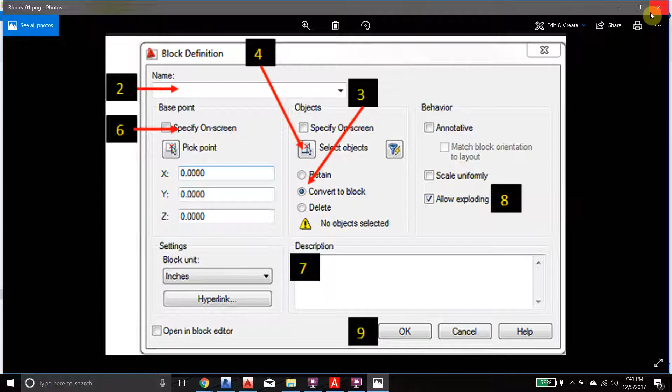If you cannot explode the block, then you have to go inside the block and then change it or rename the block. This is another story. Okay, so it's always better to keep the allow exploding on for the people to use.

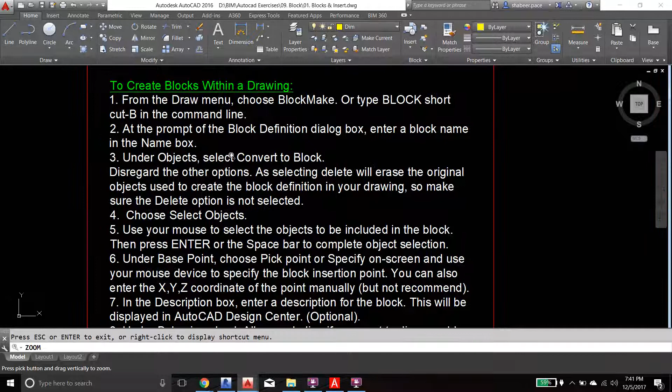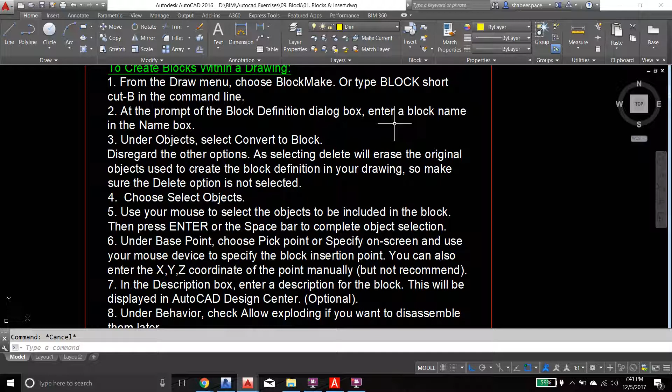And if I'm going to the block drawing, let us try to go a little bit in detail from the block. Like from the draw menu, choose block make or type block shortcut B in the command line. At the prompt of the block definition dialog box, enter a block name. This is all the steps which we were discussing there, like in the image, if you can see the image again. Yeah.

Okay. And 3, under objects, select convert to block. Disregard the other options, as selecting delete will erase the original objects used to create the block definition in drawing. So make sure the delete option is not selected.

Okay. The fourth one is choose select objects. Here you have to select the objects which you want to convert to the block. 5 is not here because it is here. Use your mouse to select the objects to be included in the block, then press enter. This is a common thing which you're doing in AutoCAD. Whenever you select all the objects, you will just right click to confirm that the object is selected. Okay, or the space bar.

The 6 is, under base point, choose pick point, that is here, or specify on screen, and use your mouse device to specify the block insertion point. That we can do now when we do a sample of the block. And in the description box, enter description. If you want to enter any kind of description for the manufacturer, for the site, then you can enter such a description for the block here.

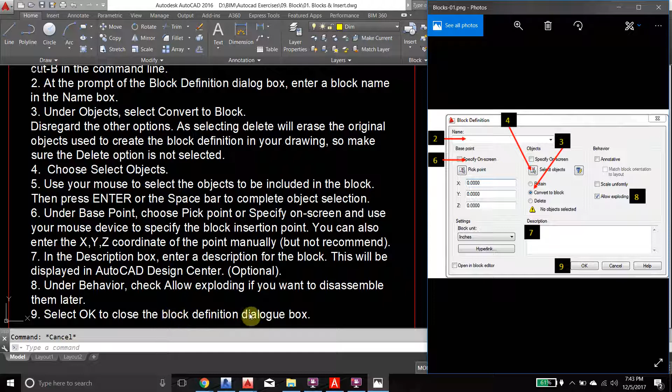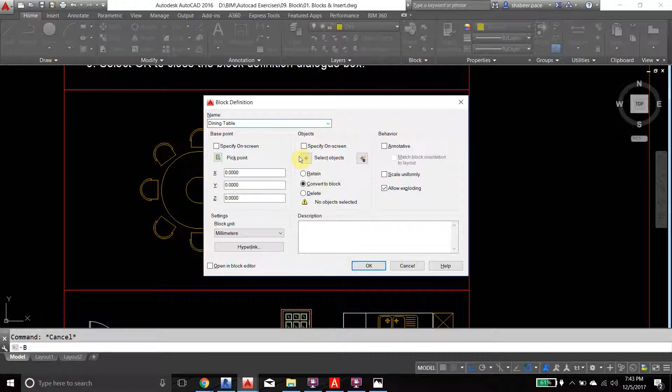Okay, fine. So I come back to the CAD, and these are all random objects which are single entities. So what I can do is I can type B enter. Let's say I gave a proper naming, dining table. I'm going to follow the steps. Select object. Okay, pick point. I need to pick a point. The pick point is important because later on this pick point will help you to locate the block.

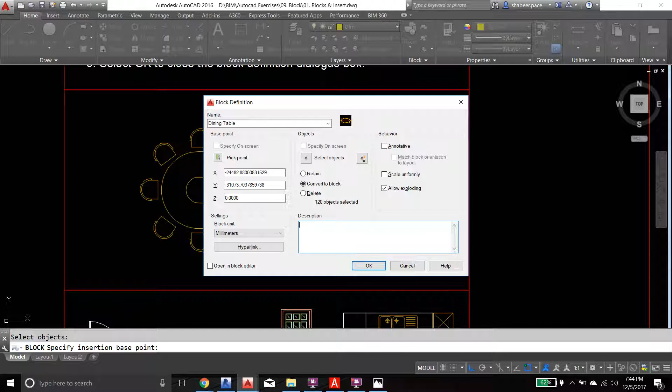So let's say I'm going to pick the point here. Remember this point, and allow exploding is done. So 1, 2, 3 and 4. That's fine. Let's say here, if you want to write something, we can say 12 seater dining table, something like this if you want it. But anyway, I'm going to remove it and then just say okay. Okay, so now it's a block.

I selected it and I went to the properties. I can see here what is the name of the block. Dining table, rotation is 0, annotative none. Block units, what are the units for the block? Millimeters. Now can you tell me what is the insert point for this block?

Insert point, this blue tag. But why are we getting this one here only? Yeah, because when you're making a block, we set pick point. We set it here. That's why the block is coming here.

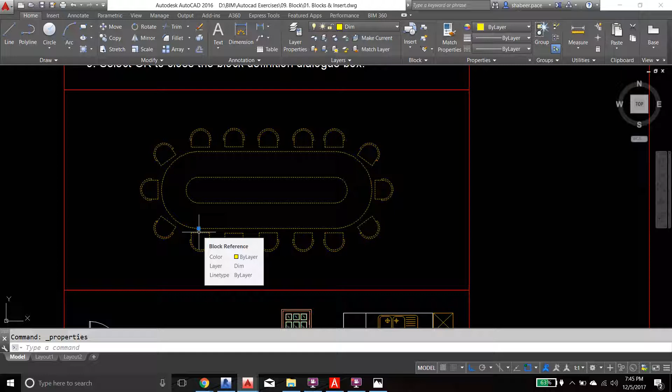Now when I type I, enter, insert. That is another one. I, enter. I can get this block back, but you have to click to paste this block. But until you click, the cursor will be holding this block at the point where you set pick point. Okay, that's the importance of the pick point.

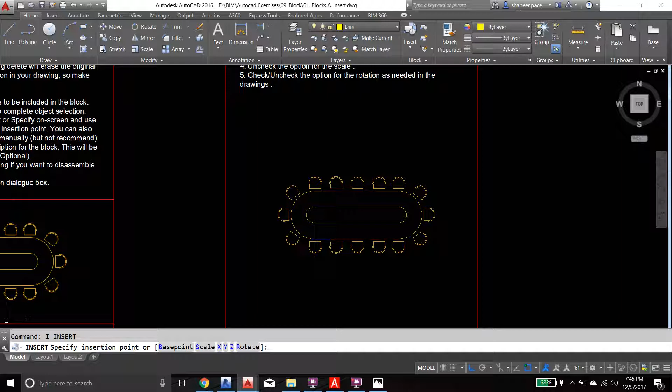Sometimes it is very important actually when you're trying to look at the doors and the windows. It can be very crucial. Okay, so there is a block. But she asked me one question. I'm going to the properties. What's the name of this block? Let's say it's a very big one, Herman Miller work chair and all these things.

Okay, first of all, let us try to simplify the name of this block. What is the command to change the name of the block? No, Text edit. No, Name edit. No. Rename. Okay, so I went to the block and I'm going down, down, down. This is because it's from Revit.

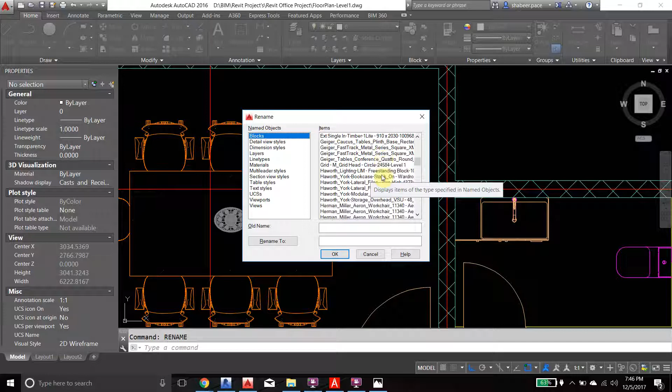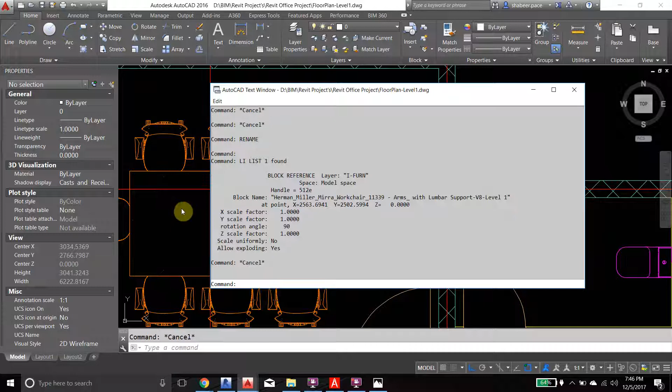Yeah, I think in that case we need to know the exact name of this one. So I will go to the list. So it is 11339 arms with lumbar support V8 level 1. Let us see if we remember this one. 11339 here. Okay, so this is the original name and I want to change it.

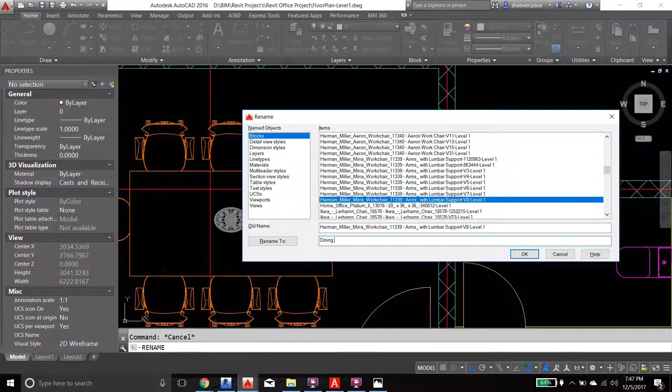So let's say I will make it very simple. Dining chair. Okay, now the question is these two, why it's changed. Dining chair. Okay, all these are by the different names. Okay, anyway, I don't want this one. I will just copy this here. Okay, I said this one, I said this one. Now these two are having the same name of the block.

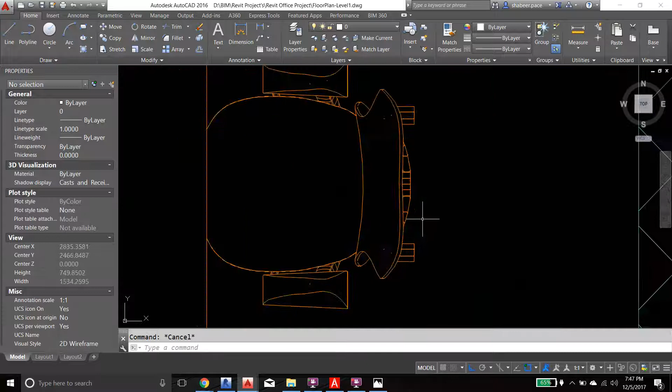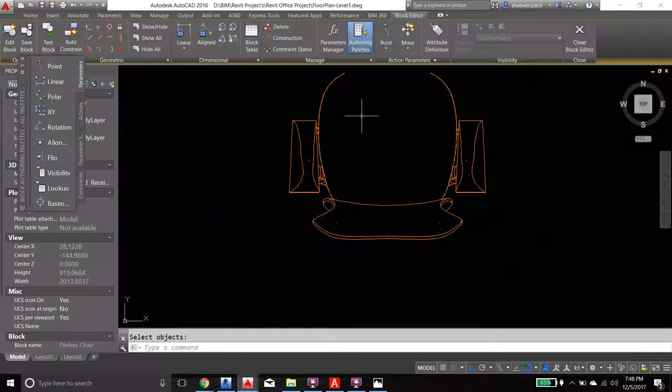Okay, now what I'm going to do is I will just go here. Let's say I don't need these edges, something for the material, so I will just go inside the block and I'm trying to do some modification. Let's say I deleted this one, I deleted this, I deleted this, and I deleted this one. Okay, then I do right click, close block editor, save the changes. The changes are edited here, right?

The changes are done here also, but her question is she wants to do the change in only one place, not the other place. Then how can we do this? Okay, to do this one, first of all we have to understand that if the block name is same, then there is no chance to do this one. If you have the same block name, then it will be applied in all the places automatically. The first thing is we have to change the block name for both of this.

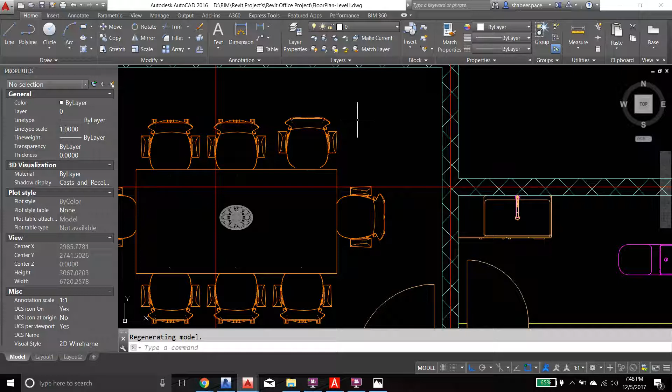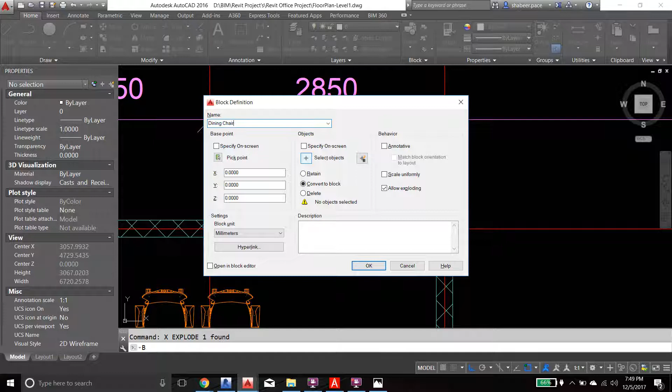So what we will do is we will just try to keep it here or move anywhere. Let's say we move here. The first thing is that I will select it and I will explode it. I will come out of the block, the first step, and then I will make the block again. Let's say dining chair 01, select objects, pick point, let's say here. Okay, now you see it's a block. I'll just move back.

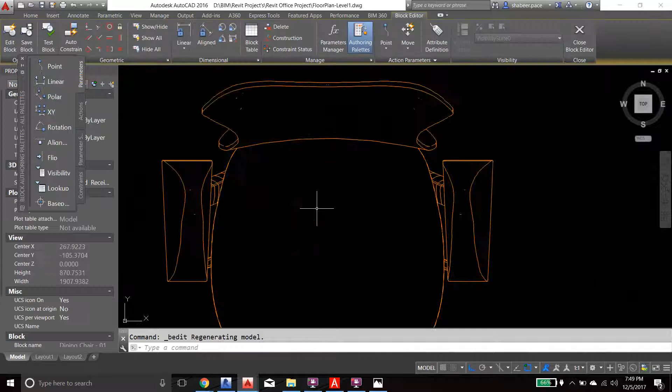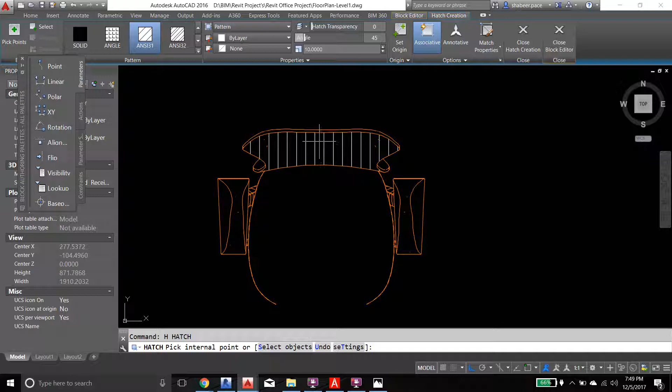Okay, now I'm going to go inside the block, and let's say I put some hatch here, pick point. Yeah, unfortunately there is some problem with the hatch. Let's say I'm trying to choose some different hatch and change the angle 45. Okay, I don't worry if it's right or wrong, but just to show you, right click, close block editor and save the changes. So the changes are done here. Are the same changes applied down also? No. Why? Because both are different blocks.

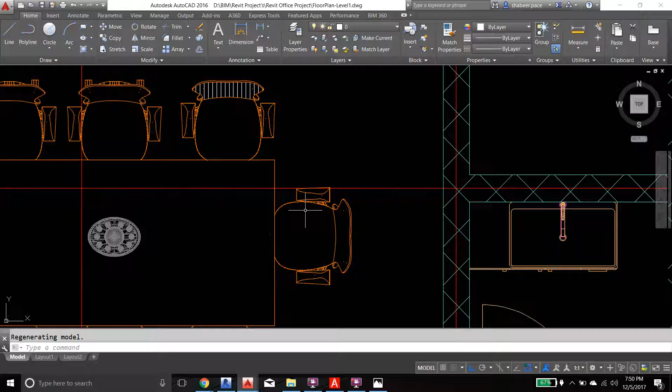So sometimes what happens is, as in the case what you're doing, you will get a block from somebody, you want to use it at one place, but the other place you want to use the same block but with minor changes. So what you will do is, you will not disturb the original block. First of all, take this block and keep it in open area, like a blank space somewhere, explode it. But you should be very careful when you're exploding.

Sometimes when you explode, the inside objects like annotation, text and all this will get disturbed. So you have to be careful when you explode to see that it's looking the same, visibility, everything is same. Then make your changes and make the block again, and then you can apply it in the places. And now I go back to the layers.

Okay, here, this is to make a new layer, this is to delete the layer. What does freezing a layer mean? Yeah, I will come to this one. And this is to make the layer current selected.

Okay, what is the meaning of current layer? Whatever you draw will be drawn in that layer. Yes, so whatever we are drawing now, we have to say that this is current. Let's say we are doing the furniture, so we'll set furniture as current. We are doing electrical, we'll set electrical as the current layer. We are doing the architecture, we'll set architecture as the current layer. And whatever is the current layer will be shown by a green tick.

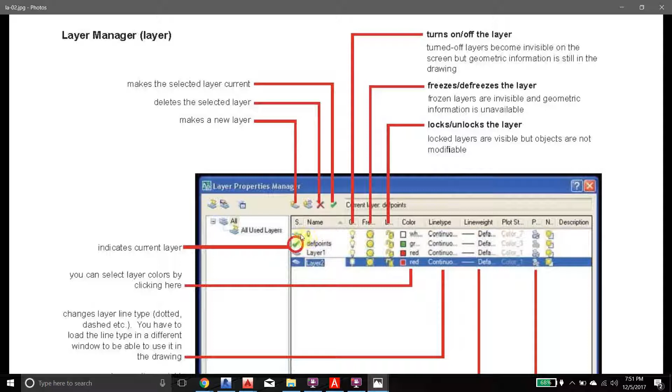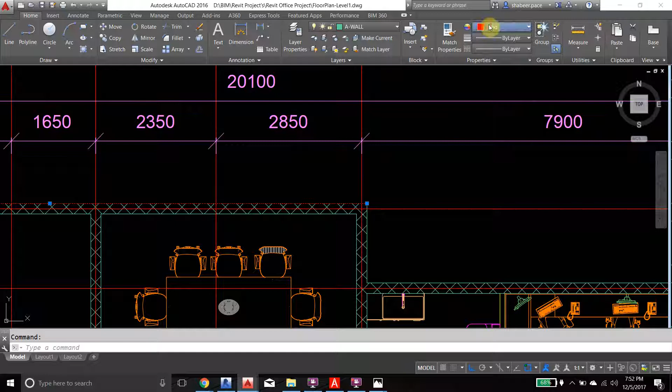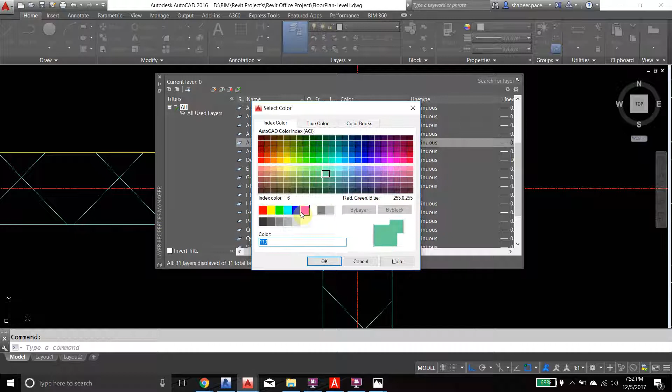Let's come to the easy terms first. We can change the layer color anytime by just coming here and changing the color. It will be applicable in all places in the drawing. I can give you an example of this one. Now what is this layer? Wall, right? What is this layer? Wall. Okay, I'm going to the layers, I go for the A-wall, and I'm going to choose the color. Let's say I'm going to make everything blue. I say okay.

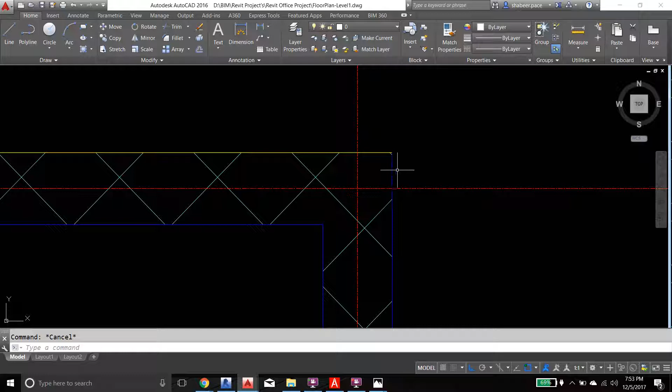What is this layer? Wall. What is this layer? It's a wall, because I select these two, it is showing the wall. If I select this one, it's showing the wall. But what is the problem, that it is not changing to blue? You have to go to the properties. There is, as I was telling you in the beginning, color. What is the color? By layer. What is this color? Yellow. No, that is wrong. I click here and say by layer. So if it is by layer, then it will change automatically. If it is not by layer, then you cannot change it from the layer. You have to do it manually.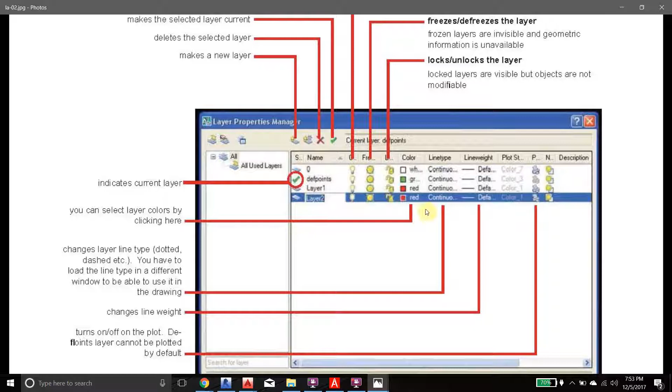And line type is whether you want it continuous or you want a dash line. We can see a simple example of that. We go back to the wall layer again. I click here, you see I can see different kinds of line types. Let's say hidden, and I say okay, close. You can see it's changed.

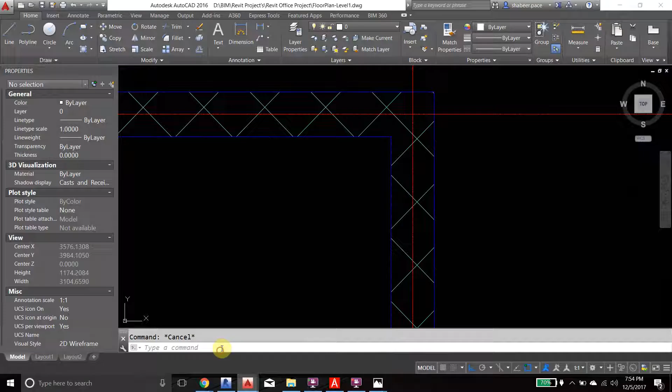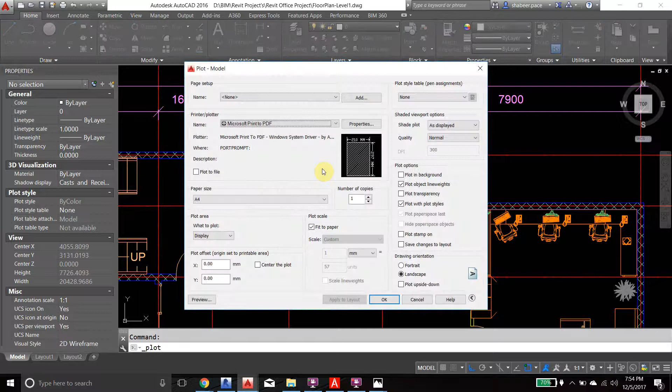And the line weight can be the thickness of the wall. Let's say I go back to the CAD, I'm going to the layer and again the wall here. Let's say 0.4, say OK and close it. Let's go for the printing. I guess it is already selected. I'll just see the preview. Can you see the wall line is thick, right? Because of the factor which we gave there. But if you look in the drawing, it's a simple line.

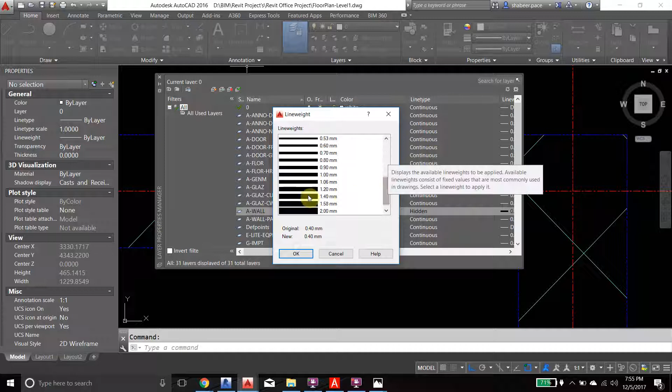Now I'm going to experiment more. I will go here, I will set this one to, let's say, 1.4. Close. I can't see anything here. I'll go for the printing and see the preview. Here it's not applied, but you can see here it's thicker. Because here the line weight is by layer. I guess here the line weight is not by layer.

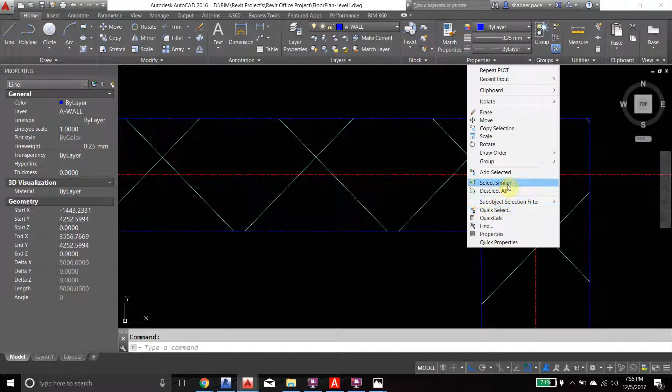Now it is a very tricky question. How can I convert all these lines to by layer directly? Very good. You select one line and say select similar. It's a very important command. Line weight, by layer. So now it's perfect: by layer, by layer, by layer. Now let us see the preview. You see. So sometimes you want to show your line dark in printing, but in the drawing you want to keep it very simple. Then you can play with the settings here.

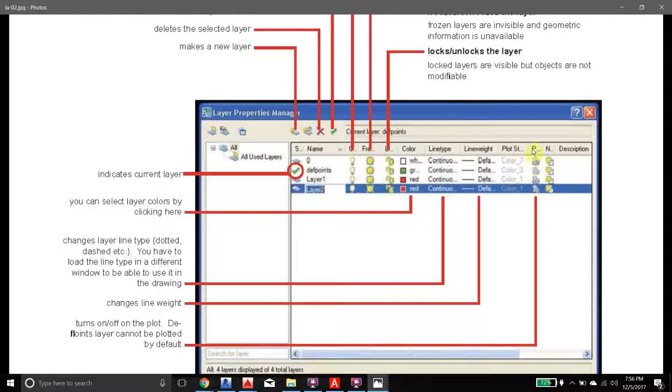There is line weight, and you face this problem before printing. If you come to the drawing, layer, the wall, and you set it non-printable and close it, and you see the preview, can you see the wall? So whenever you mark anything non-printable, it will not show in the printing. Sometimes you want to show objects in the drawing, but you don't want to show them in the printing.

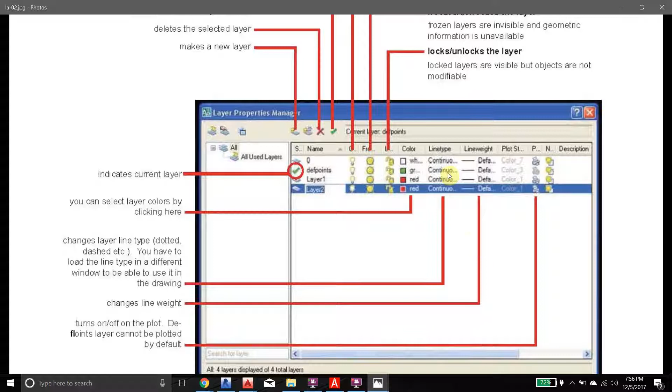Okay, now coming to the questions: turn on or off the layers, freezes or defreezes the layers, locks or unlocks the layers. The first thing is the locks or unlocks. Like if I come to my drawing again, and let's say here there is a lock symbol. I am going to lock the walls. As soon as I lock any object, mainly the objects will be like half visible. Half is going to be very light, and you know, when you select it, you cannot erase them, you cannot move them, you cannot copy them, you cannot duplicate anything. Okay, this is the first thing.

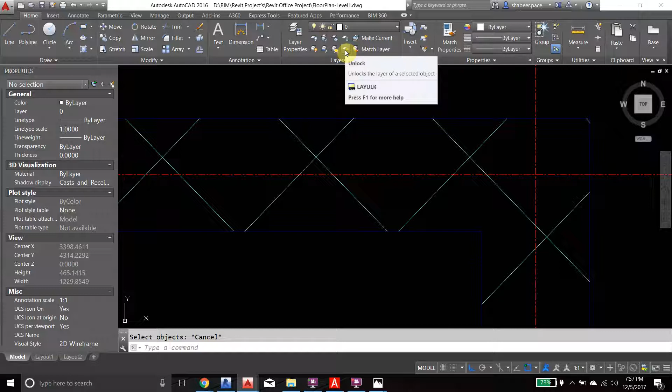And then there is an option here, unlock. So select unlock and then come back. This can be done from here also. Lock, unlock, lock, unlock. Okay, now coming to these options, on, off. Basically when you look at the on and off commands or freeze command, you can find that the application is the same. I mean, you can see that on and off is doing the same thing, freeze defreeze is doing the same thing. Then why do we need the two options for this one? Let's say wall, if I off the wall, in the background you can see the wall is gone, right? If I freeze, the wall is gone. So function is the same.

The function is of course the same, but you know, here what happens, when you're working on complicated objects, you need to off the things sometimes for a longer time. Sometimes you want to keep it off permanently. For example, if an architect is working on an electrical drawing, he doesn't want to see too many electrical objects in his drawing, but he cannot delete it also, because he needs it as a background later on, maybe after some time, or when he gives back the drawing to the electrical people.

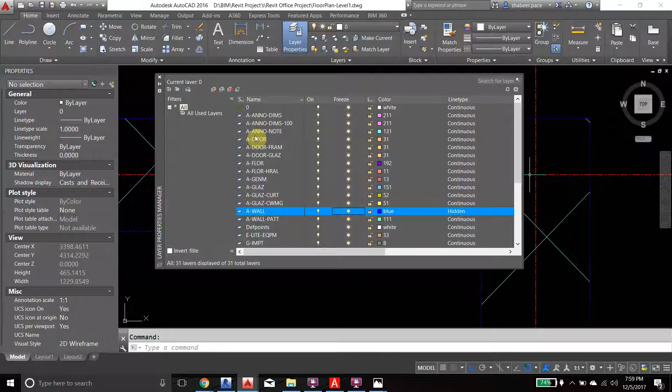So the thing is that if you want to turn off something permanently or for a longer time, then we will be using the freeze. Okay, and then you can use on and off in your daily activities, on off, on off. If you want to keep something off for a longer time, go for the freeze one. Okay, close it. Okay, so that is about the layers. I think it's 95% almost covered.

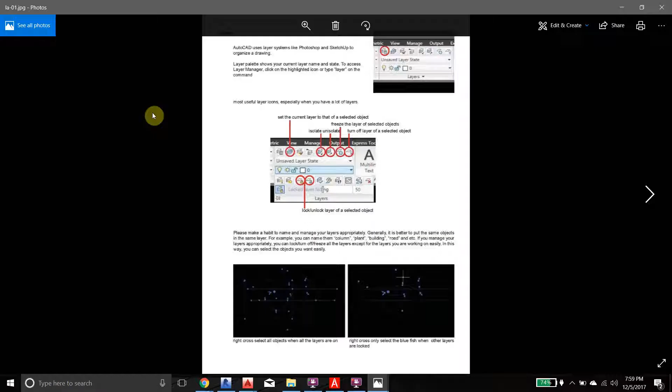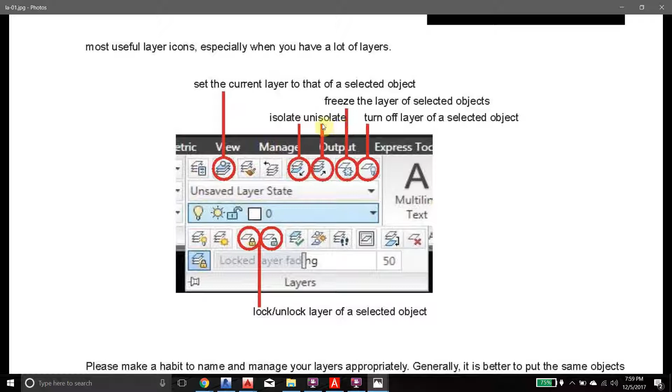I think here some more options. The same thing you can find here also. Set current. Okay. Isolate, freeze, turn on and off is okay. Done. Lock unlock is okay. But something is missing. Isolate and unisolate. Okay. Now when I look at this drawing, I want to see only the walls. I don't want to see anything else. What can I do? Yeah. I want to see only the walls. I don't want to see the remaining things.

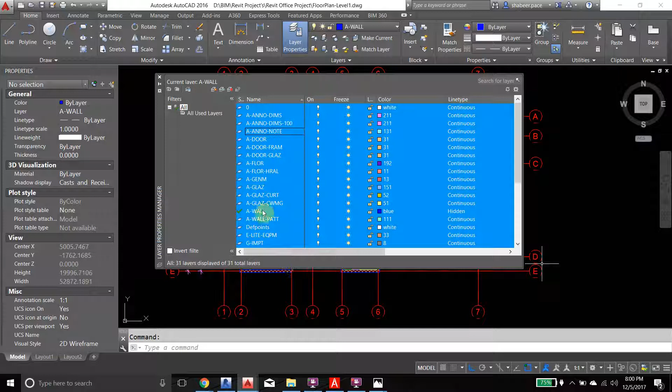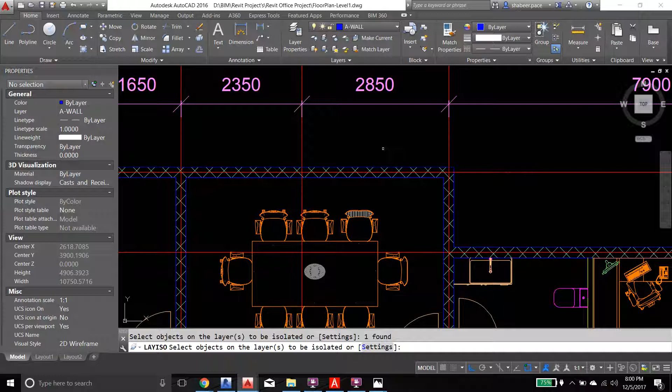So the general thing a beginner can do is you can go to the layer and you can select the wall, make it current, okay, and select everything except the wall and off or freeze it, right? So we can see only the walls, but there is another way for this one. There is something called isolate. So here, click on isolate and select the drawing and right click, enter. So if you go to the layer, you see everything will be off automatically. Isolate command can be actually here. If you go down, there is unisolate. Click this, it will come back to the previous.

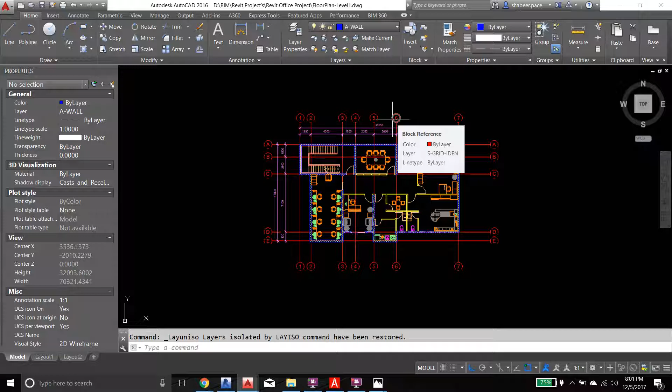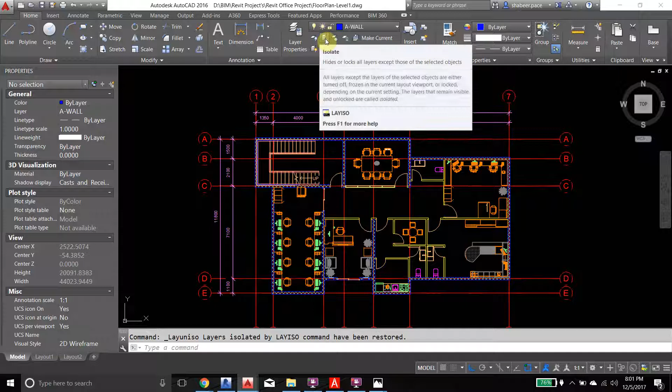Isolate command will be very useful, and you have to actually learn the isolate command because you use it time to time in your daily activities. It is a very useful command actually because you cannot go to the layer every time and select and on and off. You need to be very quick. So just isolate and select the latest one, right click, and that's it. And then after doing everything, unisolate it. Okay, isolate and unisolate. On off, it's easy. You just need to practice a little bit. On off, isolate and unisolate, freeze, defreeze, lock unlock, make current, match layer. Okay.

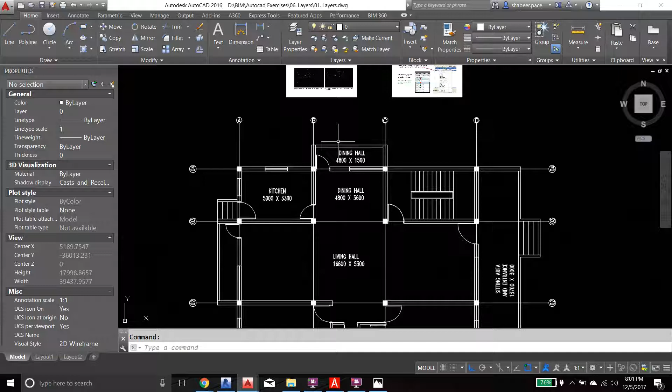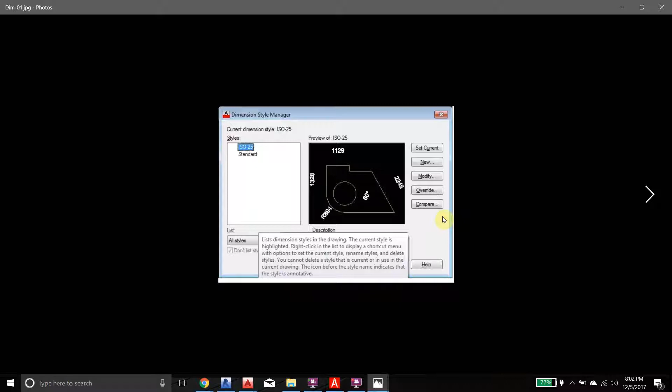And if you open the drawings, we did a big exercise on this one, you remember, like we tried to put all this in the proper layering, and the result is you have a colorful drawing. Okay, I will not discuss it now here. Right, and very quickly, because you remember the dimensions, yeah, but quickly, these images are very important. And to go, yeah, sure.